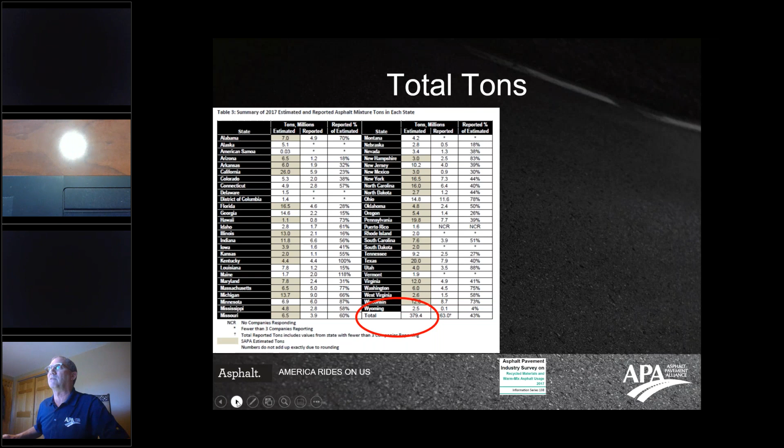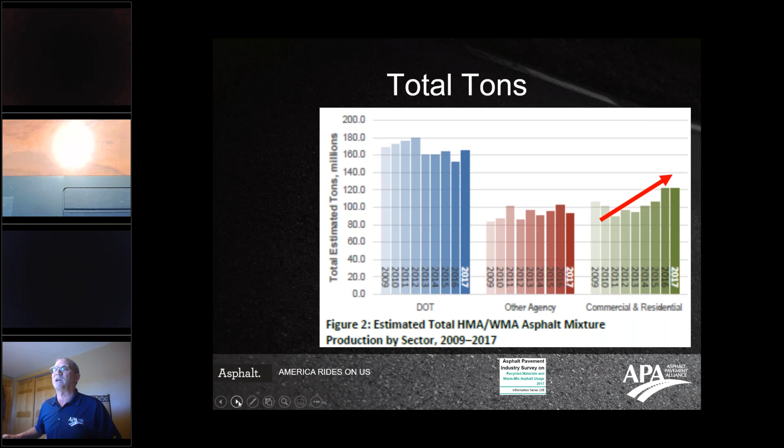So why do parking lots matter? From our industry's perspective, we wanted to gain real good insight on this. Just to share a couple of statistics, this first slide shows that around 400 million tons are produced annually around the United States for different sectors we're involved with, and this shows the disbursement across those sectors. Certainly within the last few years, our commercial and residential tonnage on an annual basis has increased, given the economic times and those kinds of things.

So again, it's about a third of our business, and it's an important sector we want to pay close attention to, sharing insights on making sure durability, performance, and those components are met for our customers, clients, and our industry. So let me ask you this: have you ever heard this comment, 'it's just a parking lot,' meaning maybe the reference is, hey, let's just get it done, make it black, get it surfaced, and get on down the road. Sometimes that doesn't provide enough insight on the real importance of what that parking lot truly is.

So I'd like you to take away something today: it's not just a parking lot, it is a parking lot. I think it's very important that there are things we can do, and things we need to pay very close attention to, to make sure it's a parking lot we walk away very proud of, and our industry can discuss with many of you how some of those things can be done.

So in essence, why this parking lot matters is, from the facilities point of view—the commercial entity, the apartment complex, a church, whatever it might be—it truly is a facility's welcome mat. It's important for all of us to put our best foot forward, making sure that welcome mat is something that entity is proud of, and that it's there for good duration, durability, and serviceability for that customer, whether it's rolling a cart across it or coming into the front door.

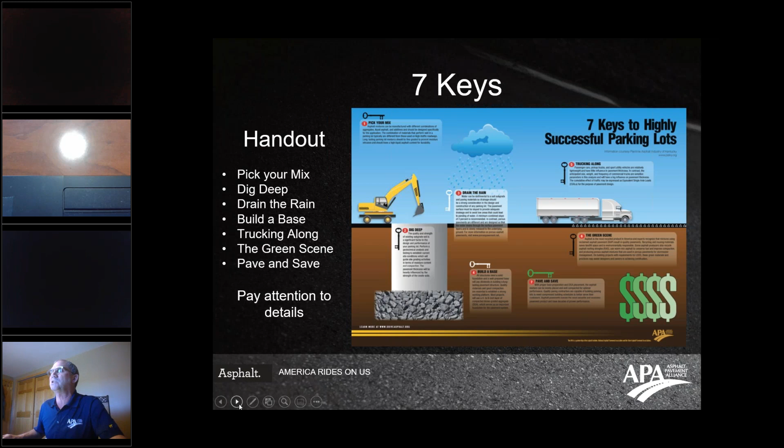So to get us started here, we really have what we call our 7 keys. This is a very important document we can make available to you at the end—if you want to reach out to us or as a follow-up, we can provide this document. It talks about really critical elements in any kind of infrastructure needs, but I want to bring it to light specifically on making a successful parking lot for our customers. These critical elements are keys, extremely important, and it's important to pay attention to those details. I want to take a moment this morning to touch on just a few of them. We at MAPA and the Asphalt Pavement Alliance have talked about 7 keys, and Missouri has just put together a very useful document with their 6 steps.

This is very similar and can be provided to you if you have some interest in that.

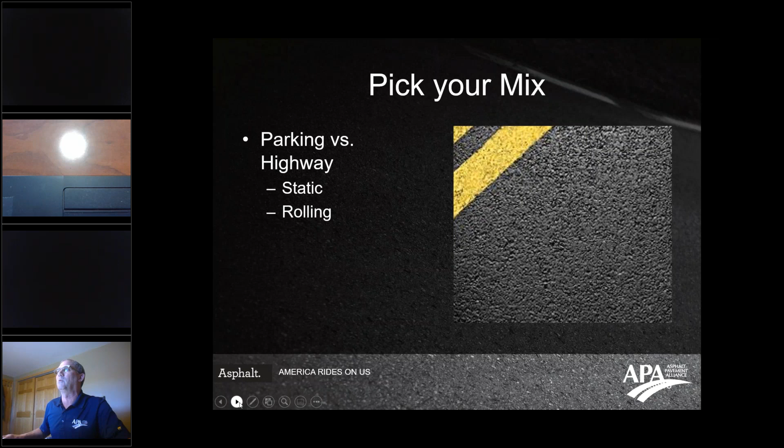If texture is very important to that customer base, we have different size aggregate materials that can provide a smoother, tighter knit surface for a commercial account, but for a rolling highway, a coarser aggregate particle would be more necessary for that type of traffic flow. We take all of this into account when putting our mixture design together.

One critical element in our mixtures is the actual glue, the binder, the liquid asphalt cement put in our mixture to hold the aggregates together. When it's not stiff enough or too stiff, it can cause different durability issues, whether it's wheel dips, as seen in the upper right-hand side, or premature cracking or fatiguing. We need to understand that the northern part of the United States versus the southern part have different attributes we must account for with what we call the performance grade of asphalt cement.

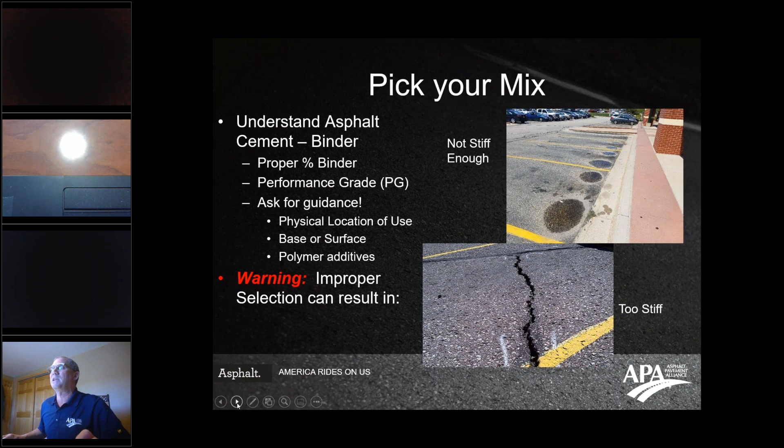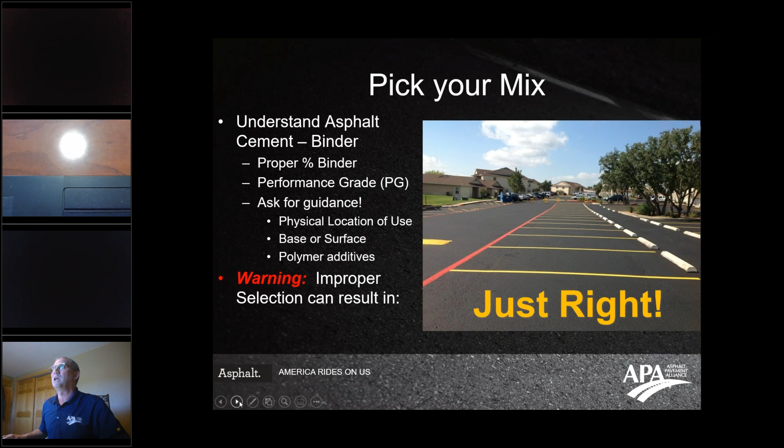All of these things come into play when picking our mixture and putting our mix design together. When we don't have the proper components put together, premature failures and durability issues can result. So it's very important to understand how we put our mixtures together. What we're looking for, at the end of the day, is being just right—having the right texture, the right binder content, the percent of asphalt cement in there, and the correct performance grade attributable to the location and surface you'll be placing down.

Another important part of our mixture is the use of RAP, or recycled asphalt pavement. Many contractors and the industry are bringing these materials back in, and one critical and important aspect of RAP is that it's a very sustainable utilization of materials—100% of the material is used back in our new mixtures. We've learned over the years to reuse these materials very efficiently, for cost efficiency but also performance. In commercial and residential locations, we may be utilizing percentages of 20 or 25%.

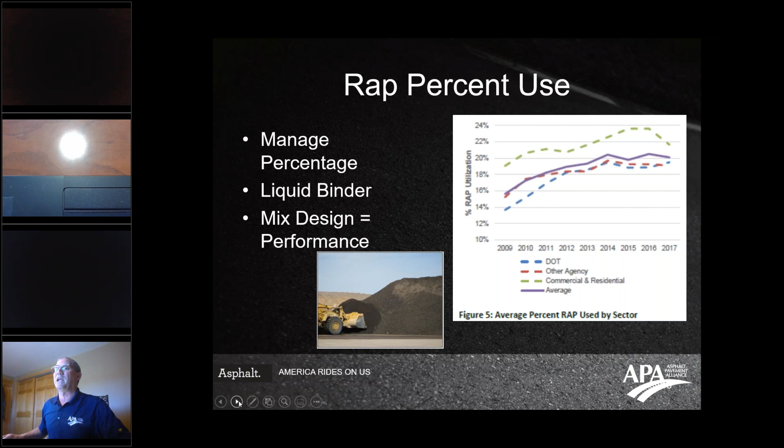Over the years, we've learned how to put the right liquid binder, the proper binder performance grade, in place to make sure the mix design performance parameters are met. It's a critical element in our industry, and we encourage the use of RAP materials in all sectors. This component has certain advantages from a cost and efficiency standpoint, while still meeting all the requirements and specifications you'd want on your surface.

Another key component, leaving the mixture aside for a second, is digging deep into the sub-base course. Building from the ground up, we need to make sure things are built on good solid footings, whether it's a building or a parking lot. Making sure the sub-base is uniform, compacted, and can support the loads and surfacing we're going to put on top is a critical part of the overall design.

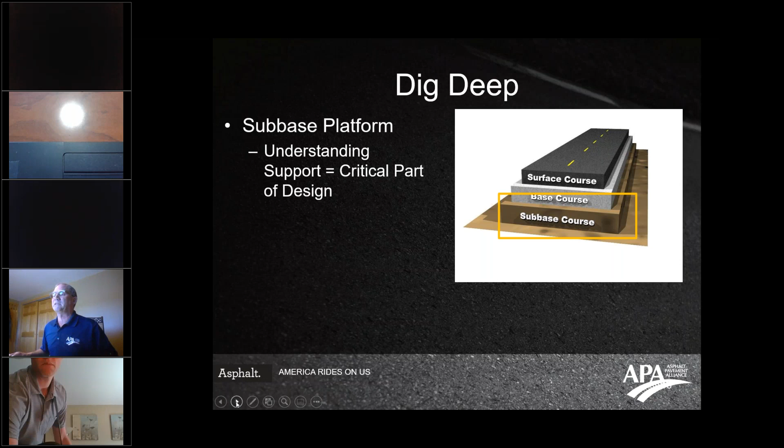And certainly in a flexible or an asphalt design, understanding these components are critical in making sure that we have success. So dealing with that sub-base course on the front end, making sure that we've got the proper platform to build up from, is certainly a lot less expensive to do on the front end versus waiting and having to see that failure later with premature durability issues where we have to go back in there. It's certainly more expensive to go back down from the top than dealing with it from the bottom.

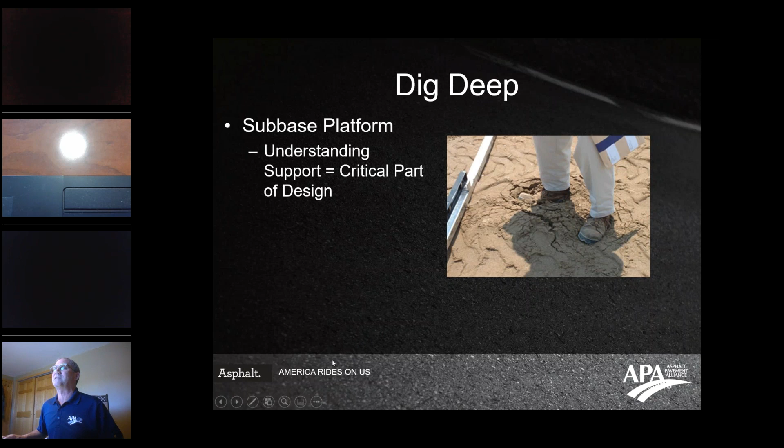So if we start seeing some of these subgrade concerns, that soil support value is just not there, we need to make sure that we address them. There are certainly ways that we can get in there to review them, do a little underground review. Maybe a boring from one of our geotechnical companies around the country can provide you some insight. A little look into the subbase can go a long way in making sure that we are doing the proper things to improve the overall performance of that parking lot, and it certainly addresses some of the things that can cause issues down the road.

Another key that I'd like to share with you is certainly the design, the actual pavement design. We call it the trucking along piece of this. This is a critical element of understanding that heavy duty and light duty type of delineation that we need to have in our parking lots.

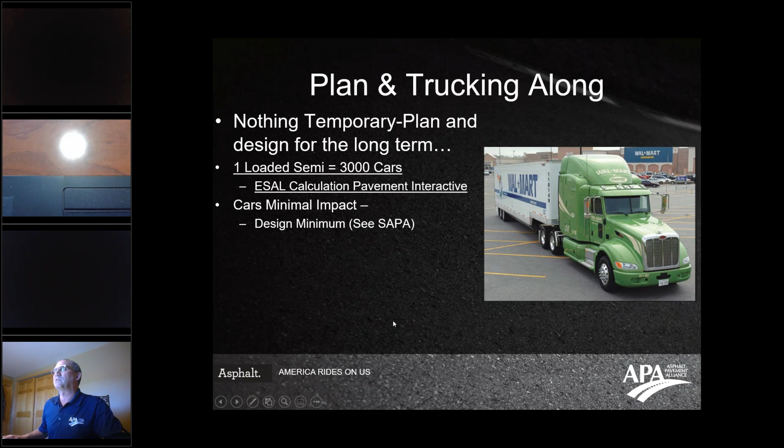Dealing with an 18-wheeler or a delivery truck such as this semi certainly can provide and does damage, strain damage to that facility. In this calculation, you can see that one semi can do the same strain or cause the same amount of damage, or ESAL loadings if you will, as 3,000 cars, and it could even be deemed more than that. So it's a critical element that we need to understand from a pavement design standpoint. Dealing with a semi and dealing with cars is really critical in understanding where they're going to be driving and what kind of pavement design thickness is going to be there.

So in essence, here is a schematic of what that pavement design thickness would need to be. As we talked about, the soil subgrade is on the bottom, taking into account maybe an aggregate base that would be part of that inner layer. Here we show 4 to 6 inches typically as that aggregate base, with about a 4-inch asphalt surfacing placed in approximately 2 lifts, or 2 layers, to get the desired thickness necessary to carry some of that light duty traffic, and it may need to be, and most likely will need to be, thicker when we get into those heavy duty applications.

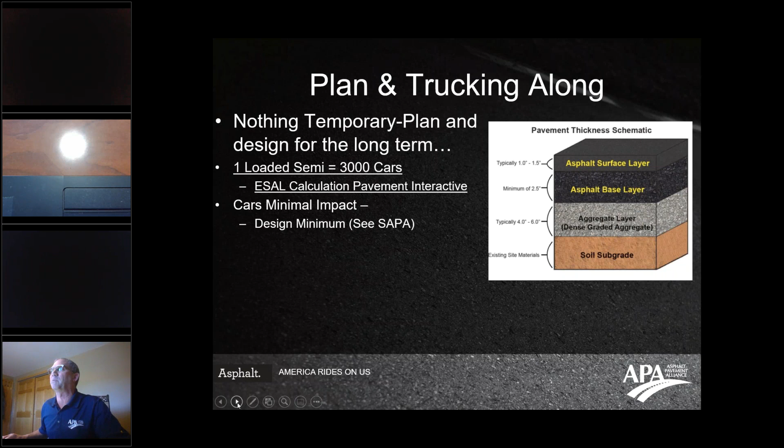How do we get to some of these design criteria? Well, we've got a tool at the Asphalt Pavement Alliance called Pave Express, and there you see the actual web link. It's an online software available to the general public, and it provides a lot of useful information as far as how to put an actual pavement thickness design together, along with many other resources. So I certainly encourage you to go there.

In addition to the different states joining us here this morning, many of our state associations can provide in-house or guidance documents located in your individual states. Many of them have parking lot design guides that can help you along with mixtures, design thickness, and things. So I certainly encourage you to go to paveexpressdesign.com and use this tool when putting a pavement design thickness together.

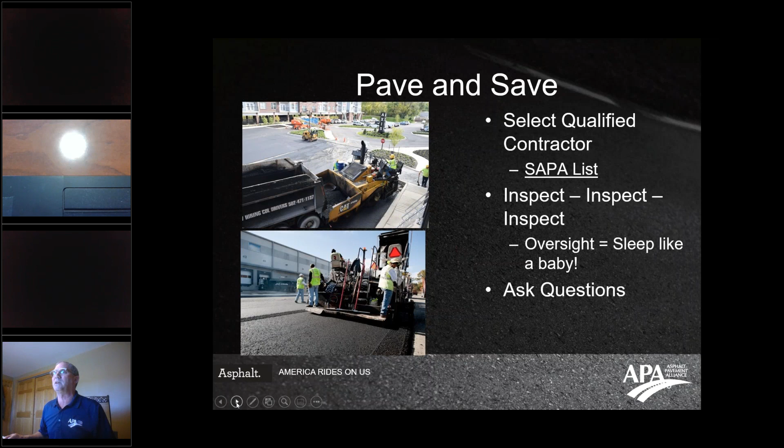To assist you in that, there are certainly our state asphalt paving associations that we partner with around the country - there are 39 of them. These are great resources for you if you are in any of these given states. By all means, utilize them, join their associations, become part of their networks - they can provide a tremendous amount of insight. As you can see here with the folks at MAPA in Missouri, they provide a great service of getting information out to you as customers and to our industry as well.

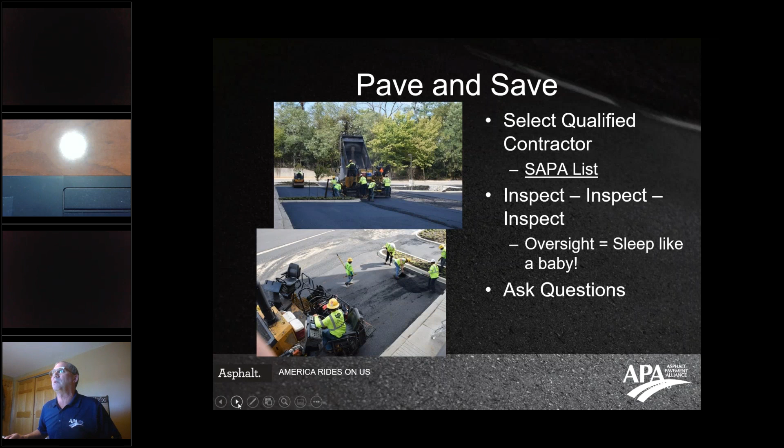So part of our Pave and Save is certainly, as you can see, these guys knowing exactly what they're doing when they're putting a parking lot down. Many of them attend conferences and technical seminars around the country or in each state to make sure that they are providing the best in durability.

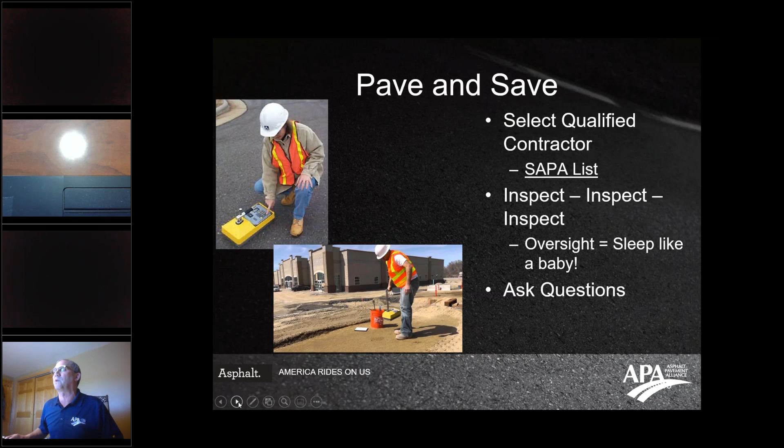And having oversight - we know that having inspection, either internally or following up, making sure that we are meeting the expectations of the contracts with our customers, is very, very important. So having a density check, making sure we're getting the right compaction, not only of our subgrade but of our actual asphalt materials - having a little bit of oversight can allow you to sleep like a baby, because you're making sure you're getting really good performance and meeting the expectations of the contract and proposal you have signed with your local contractor.

And last but not least is to certainly ask questions. As a consumer or as a consultant, make sure you ask about certain different aspects, whether it's the material design, the thickness design, the construction practices - all of those kinds of things can make a project much better and more durable as we move down the road.

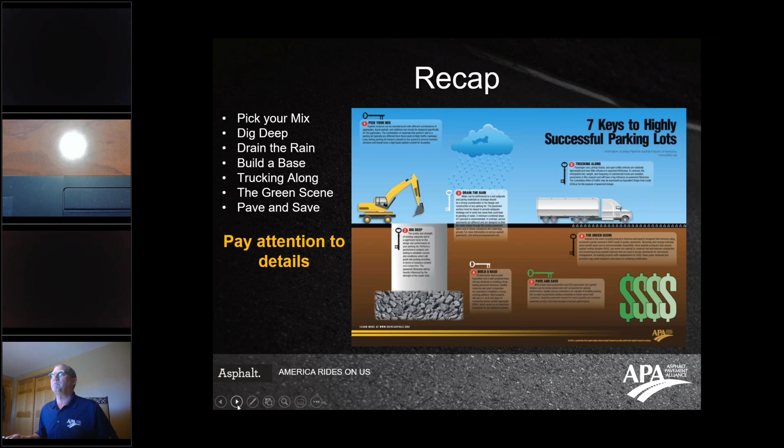So recapping here, we've got our 7 keys. They are extremely important - we want to make sure that all of them are indeed important in building. I just touched on a few of them, but by all means we've got this resource and can provide them to you, making sure we can deliver on a lot of the durability that we talk about and are very proud of in the asphalt paving industry.

So here's a question for you all again. Which key would you consider most important? If you can take a second, go ahead and respond to our poll here - a Poll Everywhere again this morning.

Again, thank you for your interaction on this polling - it provides a lot of great feedback and shares information and knowledge for the rest of the group. Well, the key is actually, as you can see, all of the above. It's extremely important that all of them are the most important - they are critical in getting the performance and enhancements we are looking for from a long-term durability standpoint. So again, thank you for interacting there.

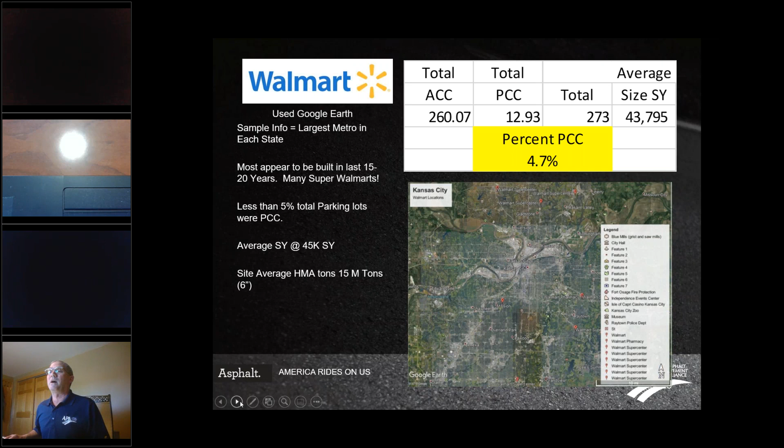And again, I appreciate your interaction here this morning. We all can learn, and it makes for a good component to what we're addressing here this morning. Well, I'll share with you, I did a quick overview, and this is probably not a scientific review, but it gives a good picture of what we've got. Looking at all the larger metros around the country, we find that only about 5% of them utilize a concrete pavement. So the vast majority, over 95%, are indeed asphalt pavements around the country.

So Walmart does indeed see the value in asphalt. I think it's useful in understanding why they would do that, but they do see the overall value in asphalt paving for their utilization for their facilities around the country.

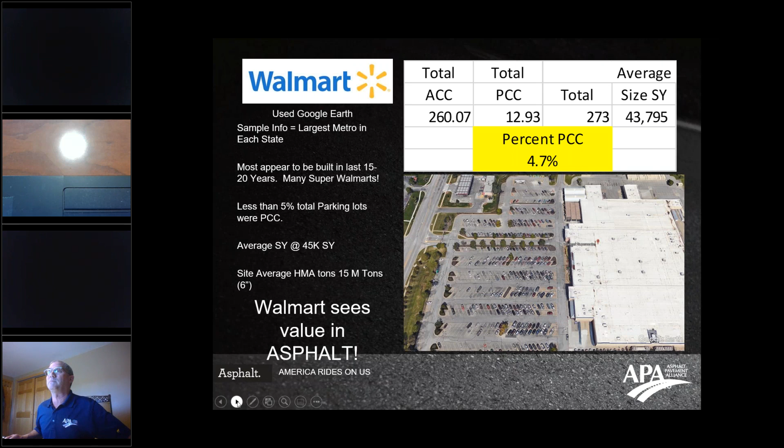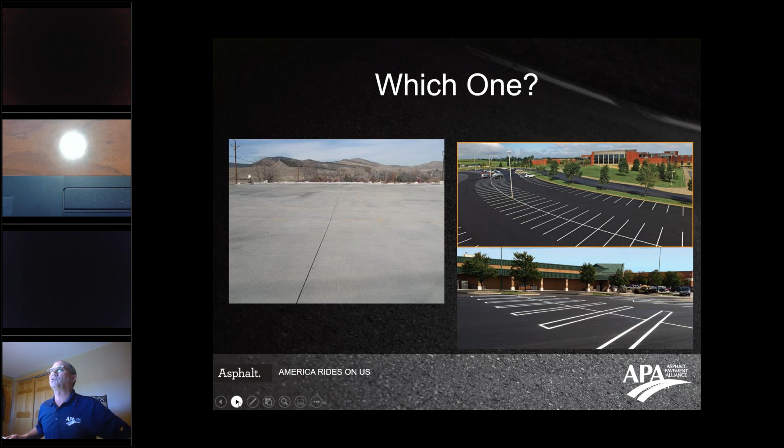So in essence, you as a customer, or as a developer or a consultant, have a choice in deciding which one is going to be the pavement of choice for your customer base. We have the ability and a proven record of making sure that we can provide the best in durability and what your customers and consumers expect when they come to your facility. Rick will share more of the value differences of these components very shortly. I want to close with a couple of things here.

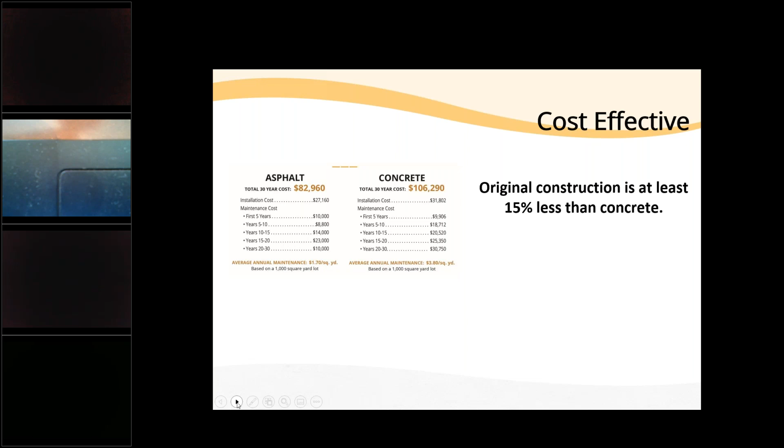And with the next slide, we'll go ahead and take a look at some of the maintenance costs and things that factor in.

With the next slide, we'll take a look at what that total cost of ownership year over year looks like, and as you'll see with that graph, it starts to become a very large gap. Going back to total ownership of a facility or building as a whole, when you factor in that the parking lot is one of the top three cost consumers, if one option is considerably more expensive, that can have a dramatic impact on the cost of owning that structure in the years to come.

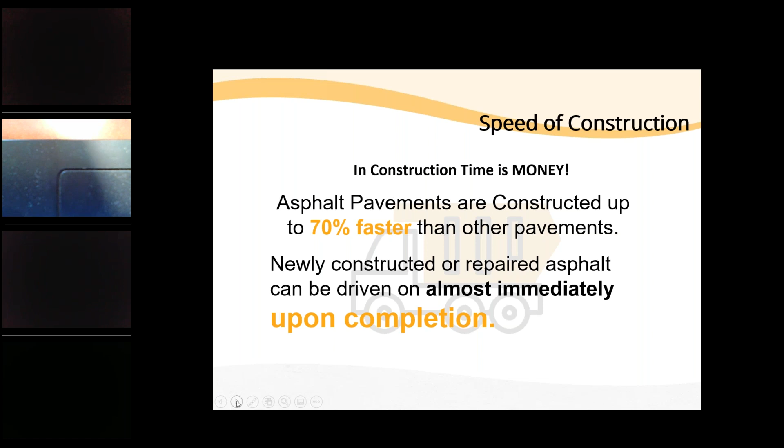Our next slide is an example of exactly what that speed can mean, tying into the overall theme Dan created using Walmart as our example. This is a Walmart here in Missouri, I believe located in Fulton, and essentially they were able to come in overnight and completely redo the parking lot with very little impact on the availability of that store. The fact that asphalt can be worked on and completed overnight is a big factor in keeping that facility generating revenue.

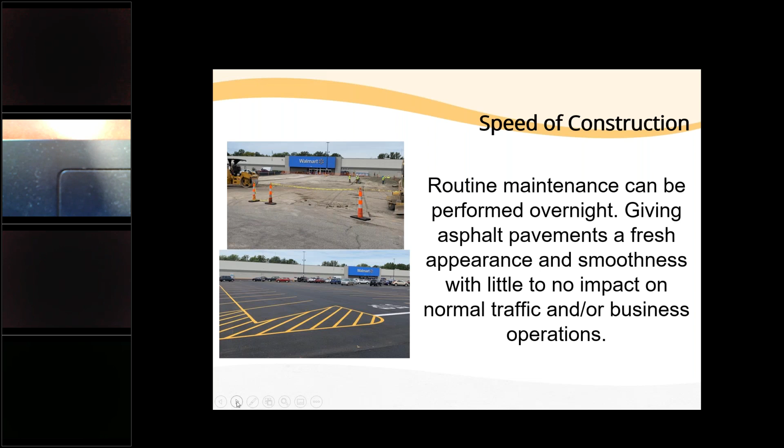And 93%, that's not done by mistake. There's a lot of research that goes into which pavement types offer the best bang for the buck, and it's significant that asphalt is utilized as much as it is.

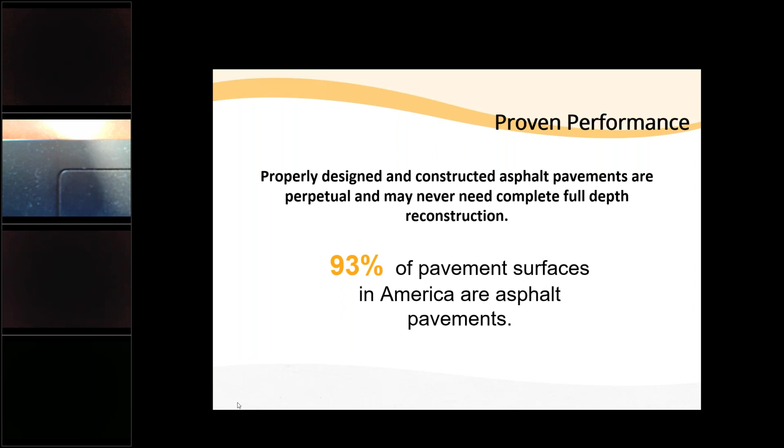So let's shift gears now and talk about how asphalt looks. It's really important, the image that a parking lot portrays - it's often the first and last thing a customer sees. I would often suggest to an owner that instead of looking at your maintenance cost of a parking lot as a bottom line expense, you should also look at it as part of your marketing budget, because it is such an image thing, and we are all concerned about the image we portray.

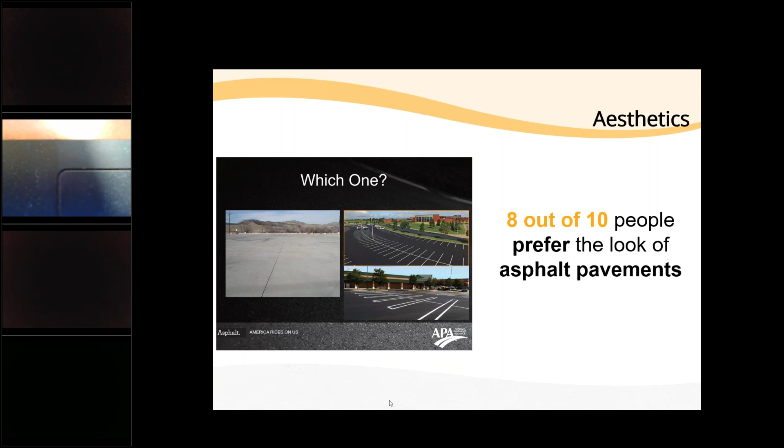It's interesting that 8 out of 10 people prefer the look of asphalt pavements, and I think our next slide will help drive that fact home. Think about it, car manufacturers spend millions of dollars a year researching ways to sell more cars, to be appealing, to make people want to buy their cars. Think about how many ads or car commercials you've seen where the car is driving on anything other than asphalt. This isn't a scientific poll, but I've never been able to find one, so I can tell you it's pretty much all of them. It's just a matter of people preferring the look of asphalt.

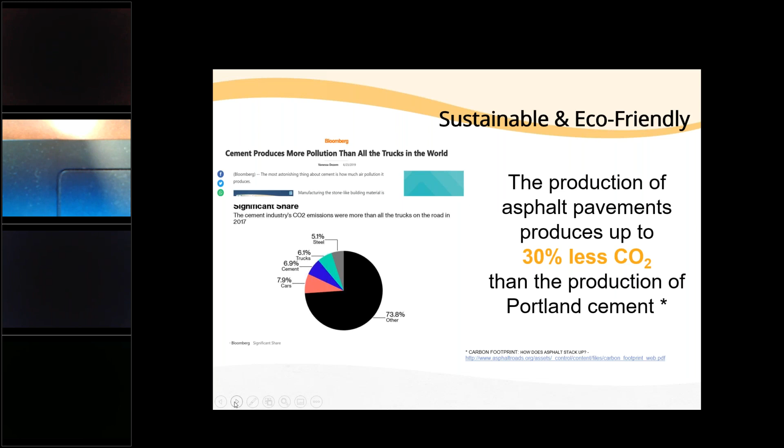So with that, let's take a look at another aspect of sustainability - most of us have probably heard something about the urban heat island effect.

A safe assumption would have been that asphalt plays a role in the heat island effect, because it's black, and black attracts and absorbs heat, so it seems to be a hotter pavement. But when you actually get into the science of how the urban heat island effect works, it's interesting to understand that asphalt actually helps reduce the energy consumption of buildings around it, because it absorbs that heat into the pavement rather than reflecting it. Reflective pavements cause heat to be reflected into the surrounding air, causing buildings to spend more energy to stay cool. The surrounding area can be affected by 5 to 10 degrees, increasing cooling load by up to 11%. So all in all, it's a very sustainable product.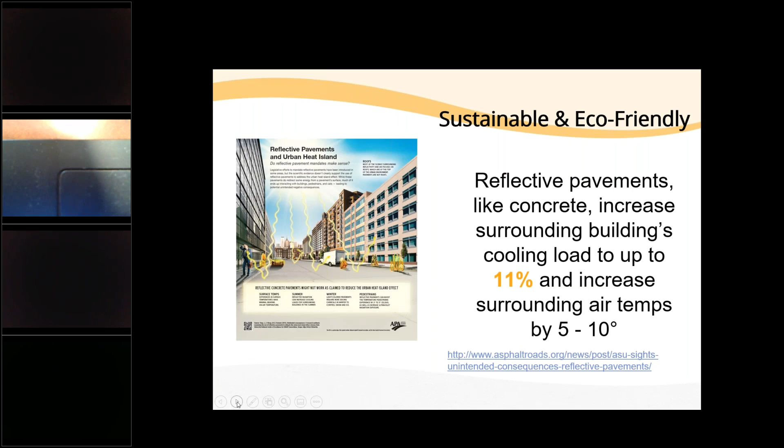As we conclude, I hope we've helped you understand that it's not just a parking lot. When you think about how you relay that message, you never get a second chance to make a first impression. Considering future ownership costs, it's worth the time and investment to make sure the lot is designed to last and gives off the image you want your customers to feel. So with that, our last slide—not only does the parking lot matter, but the materials you use to construct that lot matter as well.

We often get a simple question like, what should I use in my lot, or why should I use asphalt in my parking lot? I put these answers in here designed to be the quick response. The first one: it's cheaper. I know that's a word I don't like to use a lot because it can have a negative connotation. But for the sake of quick answers—it's cheaper, it's faster, it looks better, it's greener, and asphalt just flat out outperforms any other pavement choice.